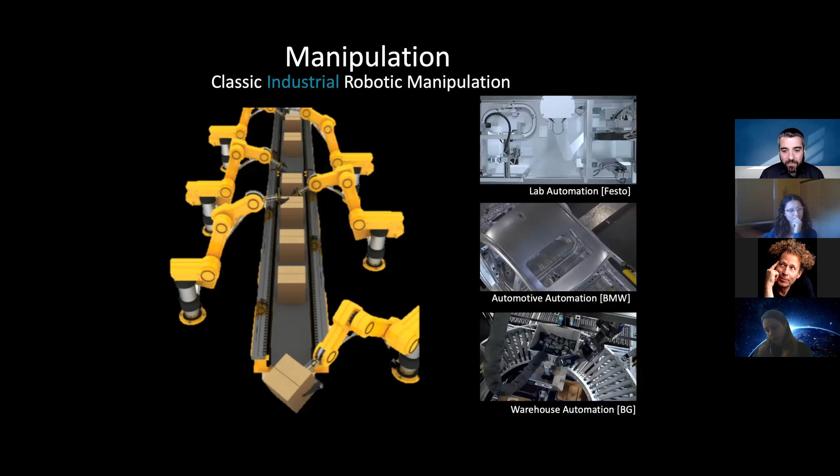So, what's manipulation? The classical industrial view of robotic manipulation has been absolutely successful and has generated dramatic impact in the world—in lab automation, automotive automation, and warehouse automation. It's the idea of moving objects precisely from here to there, one at a time. It's almost always the case that we know how the objects are shaped, we know where they are, and we know where we want to bring them, and there's some repetitive motion that has to be executed.

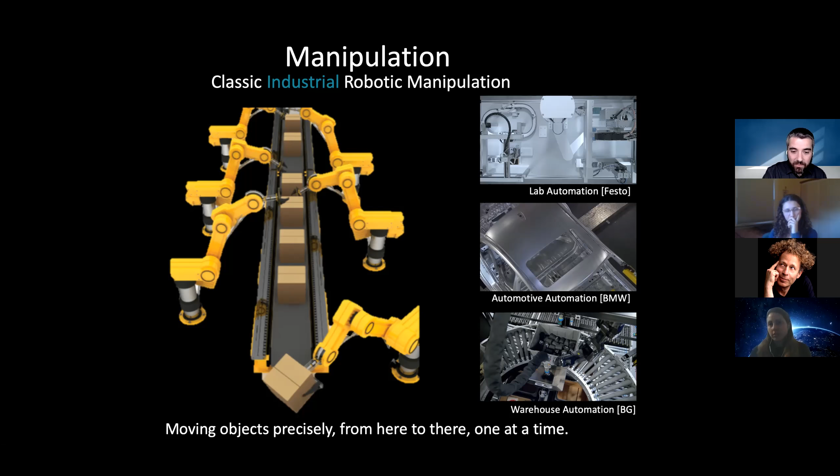Every time we work with a piece of material, it's slightly different from before. We use tools, grasping them in different ways, and novelty is actually rewarded. You're looking for new ways to do things, new ways to bend the world around us to our will. It's that flexibility, that generality, that adaptability of skills needed to work at a crafting table, that is so elusive that we haven't made as much progress as we have on more cognitive skills.

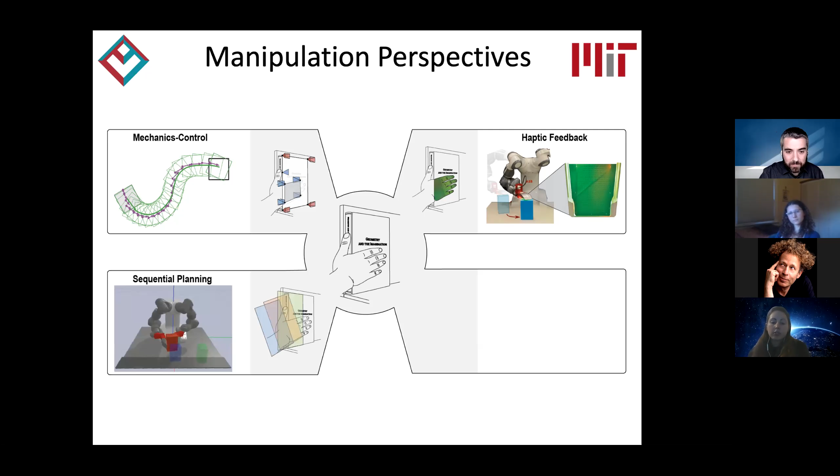A third perspective is where we think of moving the book as a sequence of actions. Maybe the first action is pulling it back, and the book moves parallel to the wall. Then there's a second action where the book is pivoting on the edge of the shelf. And then a third action where the book falls into a grasp. It's the sequentiality of those actions through sub-goals that generates long-term behavior, which has also been the focus of a significant part of the manipulation community.

And then a fourth perspective, embraced more recently, especially in the last few years, is a visual counterpart to that problem. We look at the book and think, what is it about the book, its geometry or material properties, that makes the side of the book an interesting place to put the thumb, and what makes the face of the book an interesting place to put the palm. This is clearly related to visual affordances, and motivated and promoted by the rise of neural networks, but nevertheless is another perspective on the same problem: the visual-based approach.

Now, I'm not saying anything new here. We can think of these as a division of approaches to manipulation based on the nature of the decision process. Maybe the decision process is model-driven, where we have some model of the mechanics, or a simulation model of the long-term behavior of certain actions. The nature of the decision process could be driven by models, or could be driven more directly by sensing.

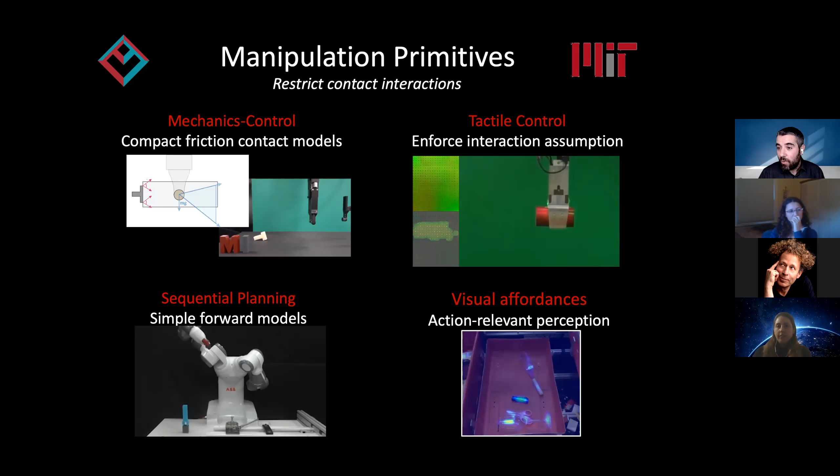So all of this just to say that when we decide to work with manipulation primitives, that has an effect on either simplifying or clarifying what is the role of each one of these aspects of a robotic manipulation system.

But the key discussion I wanted to have today is how these primitives also facilitate the integration between these different perspectives. I wanted to show two particular recent works that we've done. First, on embedding tactile feedback in mechanics models, trying to combine those two top perspectives, as well as a second one on long horizon planning with visual affordances. When we decide to have a perception system that is targeted for specific actions, how can we engage that with long horizon planning?

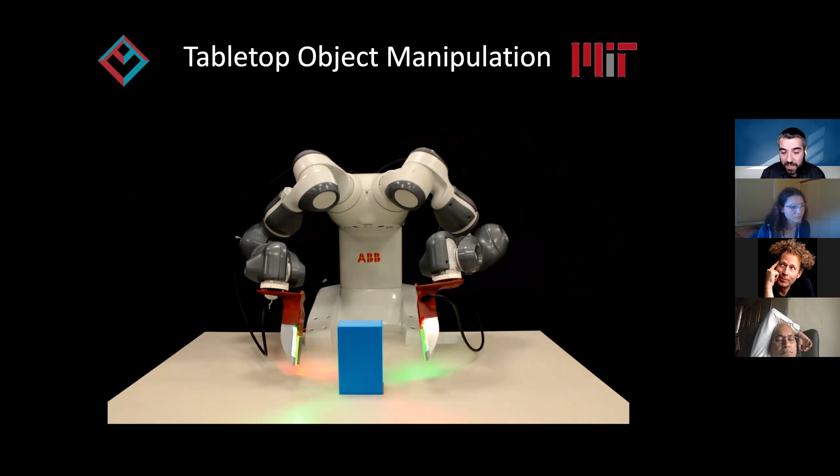Okay, so we've explored this maybe intuitive division of roles in the context of a few systems. And this is one example. There's a dual arm system with two palms, and both provide tactile feedback. And I'll show soon which kind of tactile feedback they provide. But the idea is that we want to be able to generate this behavior in a reactive fashion. The robot is executing a series of primitive interactions with the object. In this case, it's an object with known geometry. And each one of these primitives is executed in a closed loop fashion.

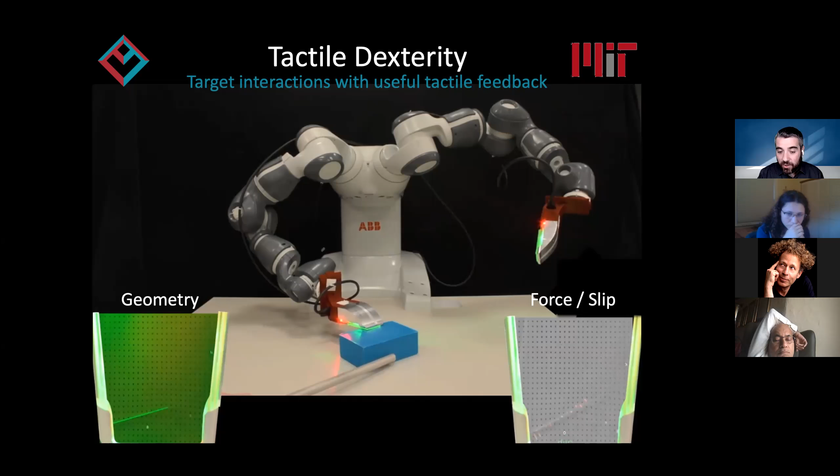So first of all, the type of feedback we get: this is a version of GelSight that has this wedge shape to facilitate interaction, but it's the same idea. There's a camera inside the palm looking at the deformation of the skin of a gel, and by visually tracking the deformation of that skin, we can estimate geometry, and we can estimate shear or forces at the interaction. So on the left, you can see the edge of the object. This is a very structured setting where the object is cuboidal, so that it's easier to know what we need to track in the palm. And on the right-hand side, you see how the sensor is tracking when it's slipping versus when it's not slipping, or trying to estimate contact forces. In this case, it's always slipping. But with this type of sensor, you can capture both things in real time.

Now, if we have access to that type of information, going back to the division of roles of these two controllers, we can derive an object state controller whose task is to replan trajectories for the motion of the object, right? It exploits the assumption of sticking to continuously replan how to move the object to a particular desired location. And because it exploits that simple mechanism, it can replan fast enough. And then there's a second controller whose task would be to monitor the downward force so that, if it detects that the object is about to slip, it will try to exert more force.

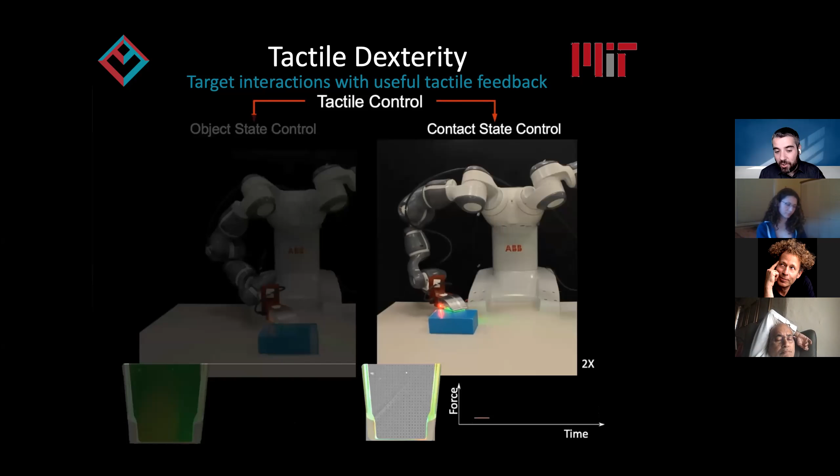So now on the left-hand side, if we perturb the object, the robot will try to bring its current best estimate of where the object is, in this case an implementation with just tactile feedback, to the goal pose. And here's a second controller where, depending on whether the object is slipping or not, it modulates the gripping force, or in this case, the downward force.

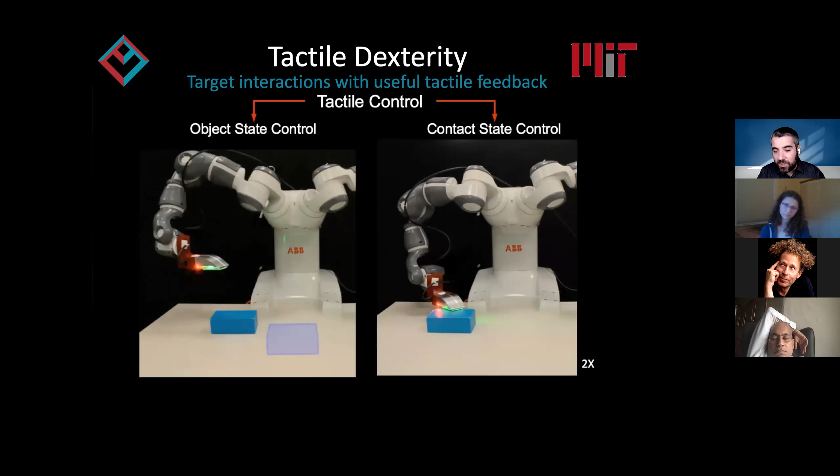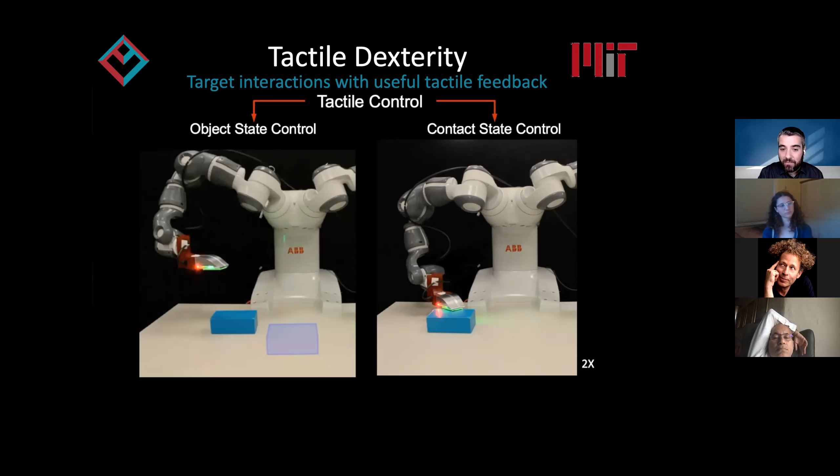And then in general, the first controller is very primitive dependent, right? So every primitive, based on the assumption it's making on the interaction, will have access to its own controllers. If it's pulling, it's just a purely kinematic trajectory, but if it's pushing, it would need to use a different controller. If it's grasping, it will use a different one. And the contact state controller, we can think of it in a more general fashion. The idea is that we have a multi-contact setting, and we want that multi-contact setting to remain constant. We want it to be in equilibrium.

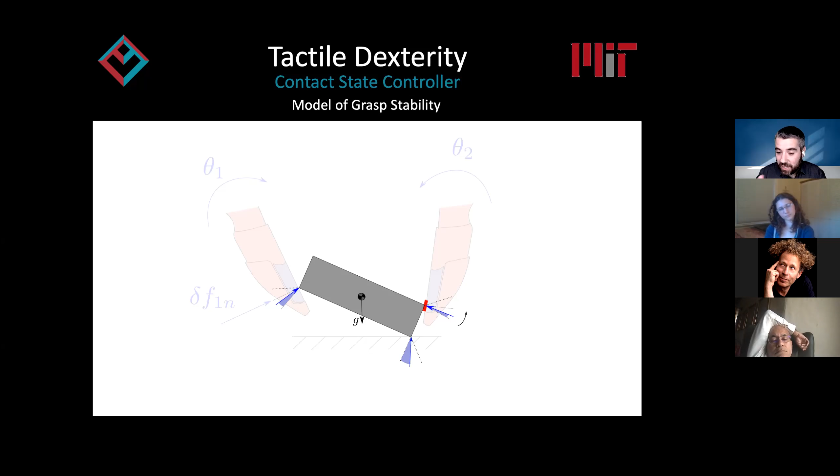We can derive a model of the robustness of this multi-contact setting by approximating it by how far or how close each one of these contact forces is to the edges of their respective friction cones. It's the distance between the contact force and the edges of the friction cones that captures the robustness of the multi-contact configuration. And we can write this.

This is a standard formulation, quite similar to the one used, for example, in the locomotion community, where we try to maximize this margin of stability, or the distance of the contact forces to the edges of the friction cones, subject to force equilibrium. We want to make sure that the contact forces are always balancing the external wrench, in this case just gravity, or possibly also external contacts with the environment, and subject to Coulomb friction law.

And this defines an optimization problem that we can't really solve in real time because the margin is non-convex, has a trigonometric expression, and the force equilibrium condition is bilinear, right? So in this problem, what we're going after is what are the changes in the contact forces as well as the contact locations or orientations of the palms that maximize the margin to the edges of the friction cones.

And because we can change both the Jacobian as well as the contact forces, this is a bilinear constraint. It's difficult to optimize in real time. So we do a convex approximation of the margin and linearize around the current configuration to be able to solve this in real time. And with that, we can implement it in almost real time.

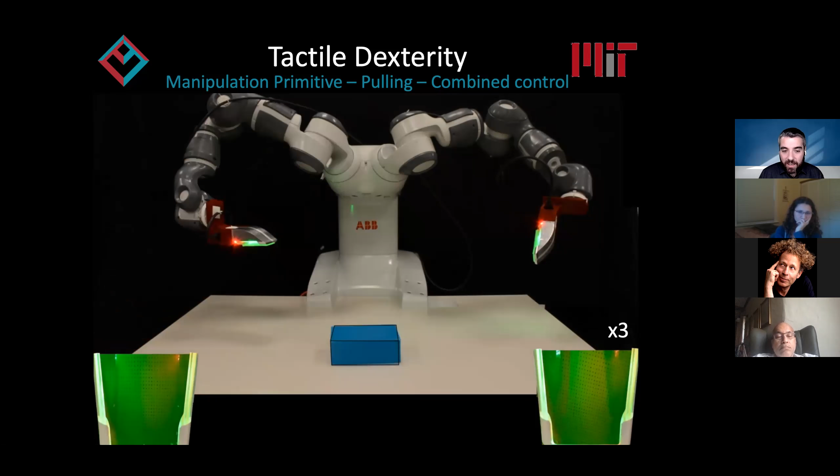And then when we put these together for different primitives, all of them executed in a reactive fashion with their own object controllers, but with the same contact state controller, we can build a system that chains sequences of executions of manipulation primitives to change the location of an object from configuration A to configuration B in a reactive fashion. Reactivity just at the primitive level, not at the planning of the sequence of primitives.

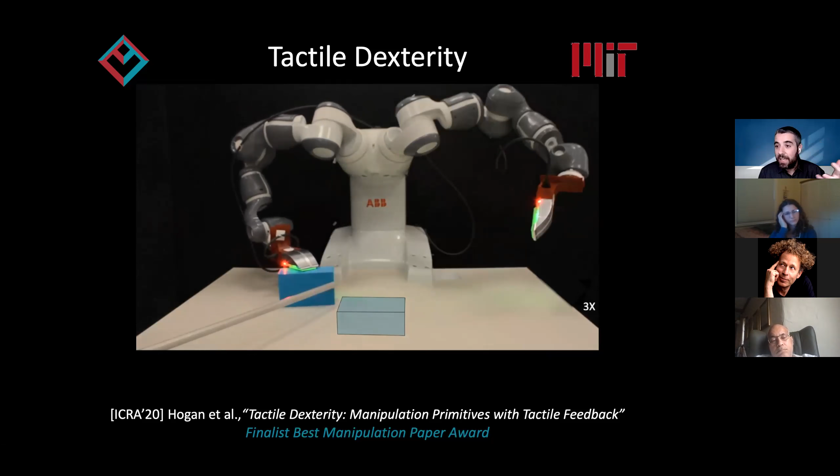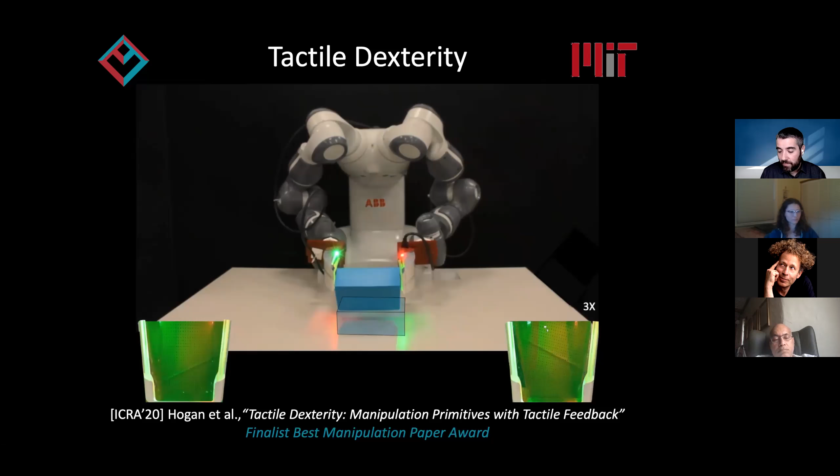And the key idea here is, again, that division of roles between having two controllers, one that is in charge of enforcing a certain assumption that is dictated by the primitive, and then another controller that is just exploiting that assumption to move the object. Now, this division of roles can be used in different contexts, in different manipulation scenarios or with different primitives, and not necessarily just for sticking, but also, for example, for sliding.

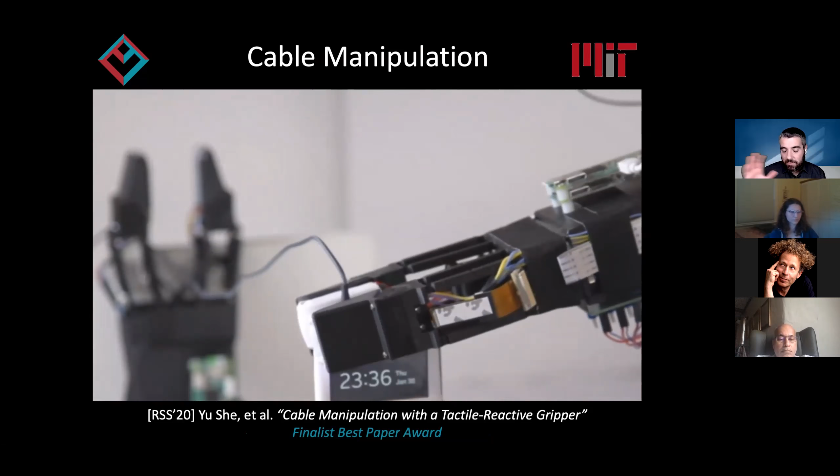Here's another system that we built recently to manipulate cables, and it's again purely driven by tactile information. There's no vision here, and the goal is to get the robot to slide its fingers along a particular cable. And the way that this system is able to do it fast without having to rely on vision to do state estimation of where the cable is in real time is, again, using exactly the same division of roles for two controllers.

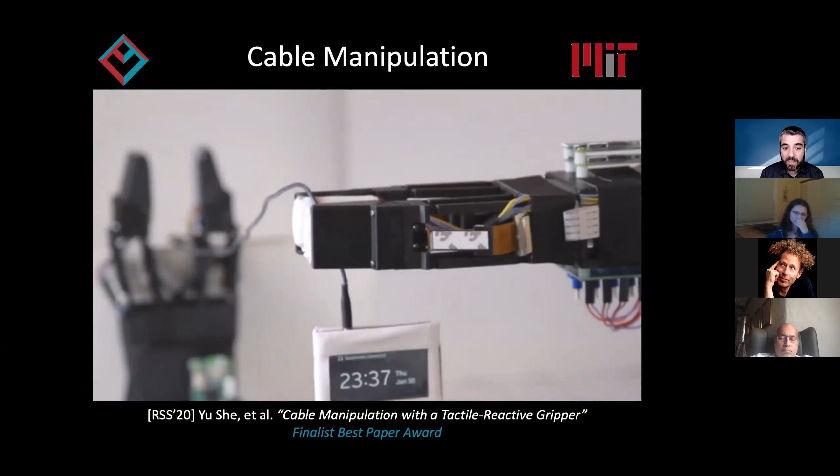One controller is in charge of controlling the position of the cable in the fingers: controlling the orientation of the cable in the fingers, as well as the position along the length of the fingers. And it's doing that by using the real-time estimates from the tactile sensor of the orientation of the cable. And it's doing it also by exploiting the benefit of having a parallel controller on its side that is controlling the gripping force on the cable so that the fingers can slide smoothly along the cable, right?

So that's a task that without real-time accurate gripping control would be difficult to do, because if you apply just a bit more gripping force, the cable would get stuck on the fingers. And if you apply less force than is necessary to maintain it there, the cable will fall. It doesn't matter what the fingers do to be able to recover it.

If the fingers open or don't apply a certain amount of force, the cable will fall. So by combining a controller that is just looking at the gripping force and making sure that the frictional forces when sliding the fingers are within a certain range. That's pretty much what it's doing. It's just looking at the average shear force in the fingers. And if it's too large, it will open up the fingers a little bit. And if it's too small, it will close them a little bit.

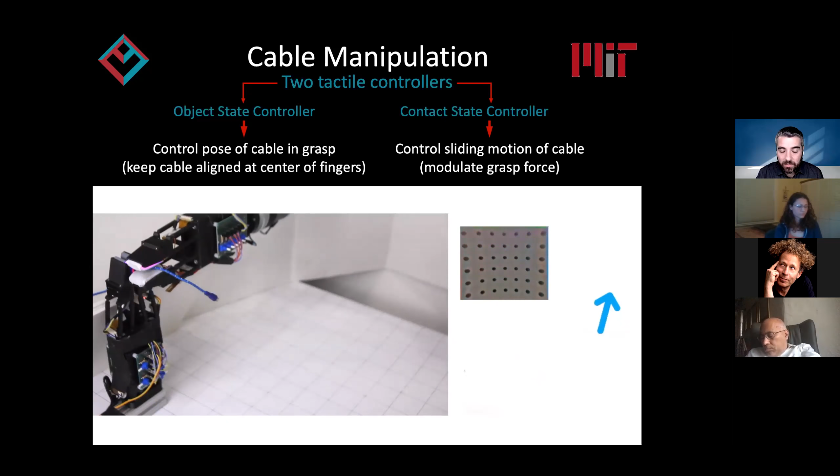And again, it is precisely the assumption of this primitive, in this case that the cable is sliding, that is on one hand enforced by one controller and on the other hand exploited by the other controller. Now it's not in a model-based fashion, the model is directly learned from data. But it's that simplifying assumption of the primitive that makes this possible. Any questions?

Hi, yeah, I have a question. Sorry if I missed this. How are you estimating forces for your GelSlim sensor? Is there a separate force sensor in the gripper? So I guess more or less all of these sensors work the same way. So I'll just illustrate it in the case of this sensor.

Inside the sensor, there are these dots embedded in the gel, and by tracking the location of these dots, we can estimate the displacement or the stretching of the skin. And then you can go the extra step, which we do sometimes, of using inverse FEM to estimate the force distribution. But actually, in this case, it turned out that that wasn't necessary. Just by using a proxy for friction, which would be the average deformation of the skin, that was sufficient to control the system.

Oh, I see. Okay, so I guess you're using a friction model essentially to back out an estimate of the force. Actually, in this case, we're not even doing that. We are directly regulating the gripping force, not to maintain a level of friction, but to maintain a level of stress on the skin. Oh, okay. Got it. Thanks. Cool.

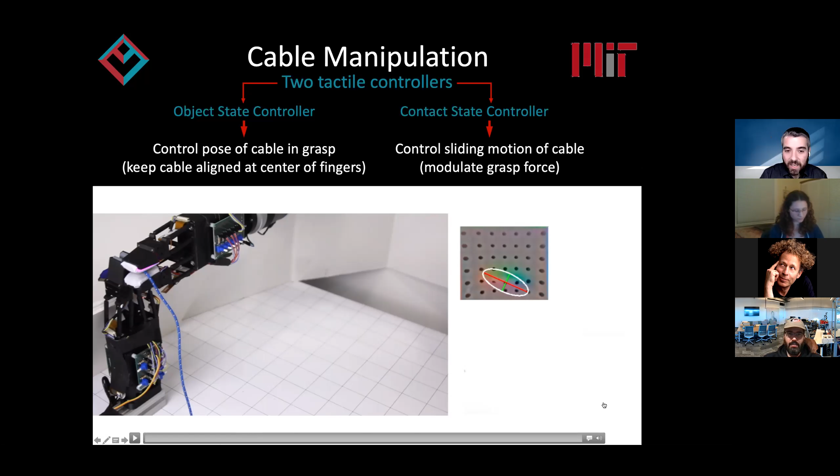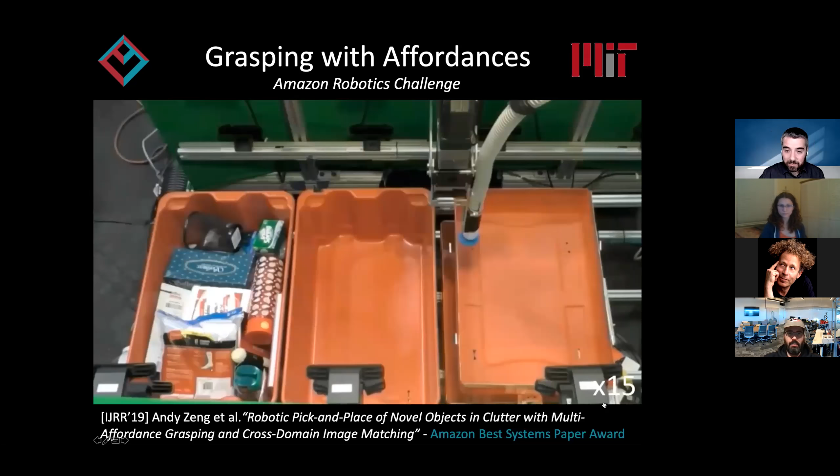I'm just going to give a highlight of the second part. There's been a significant amount of work on what we were discussing before—visual affordances—triggering behavior directly from visual observations of geometry or materials. All of that has generated amazing, reliable performance, especially when dealing with clutter and with the large variability of objects.

In the Amazon Robotics Challenge, but also in a lot of research at Berkeley, for example, using neural networks to learn direct maps from raw perception to action in the form of manipulation primitives has shown amazing behavior. And the caveat is that because we're operating directly in raw perceptual space, we don't have the ability to exploit what primitives give us, which is an expectation of what will happen with that object.

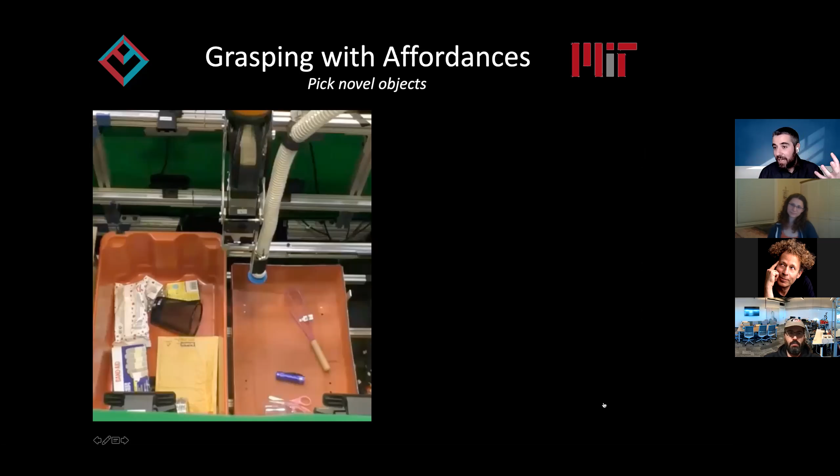So we don't necessarily have forward models to predict how the state will be after executing that action. There's a lot of work going on these days on computing or learning foresight models for what the perception will be after executing a certain action. To me, that's a key challenge we need to address: how to merge these visual affordance models with planning so we can do sequential decisions to generate competent manipulation systems.

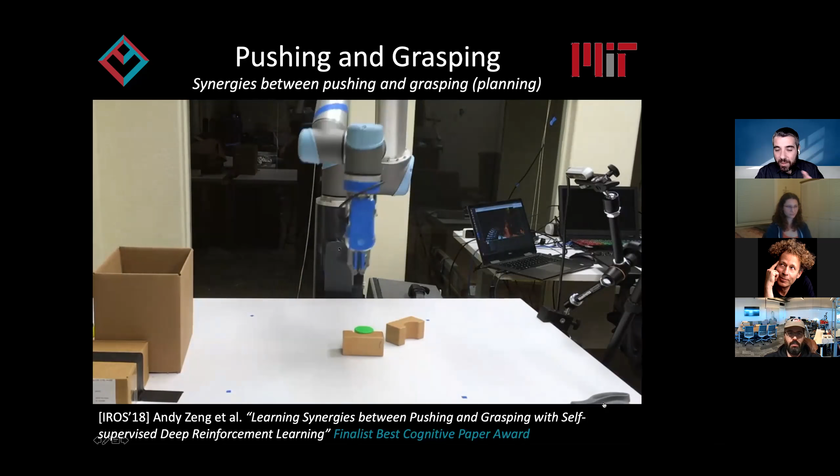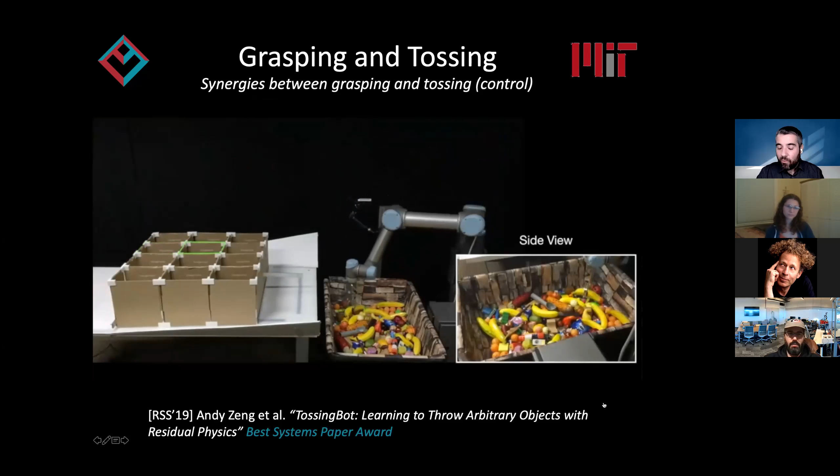I'm going to skip these, but the idea is we've been looking at different aspects of sequencing manipulation actions, always without necessarily having an explicit model that predicts what's going to happen—using deep reinforcement learning to sequence pushing and grasping, or grasping and tossing. But all of these implementations explicitly avoid having to do a forward prediction of what the state will be in perceptual space after executing a certain action.

When it comes to solving problems like the one I showed before on a tabletop scenario, doing that without a forward prediction model is quite limiting. If you want to plan a sequence of actions like a pull, a grasp, and then a push, it's very difficult to do without the ability to predict forward how the observation space will be after executing each primitive. So one of the things we've been doing is finding a way, defining a framework, to be able to do that.

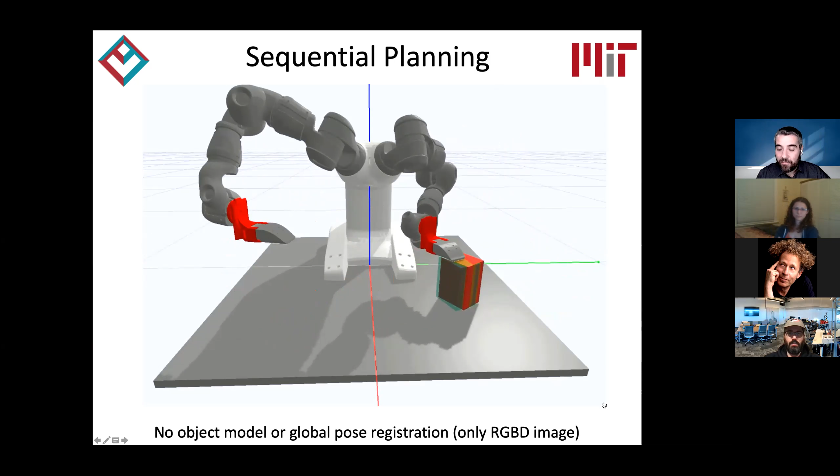Again, the idea is to exploit manipulation primitives and the assumptions that they make. We need to expand this notion of affordance from just locating a point in RGB space to having a more precise model that predicts contact locations. And then we need a predictive model so that we can change subgoals, for example to plan this sequence of pull, grasp, push. I'm going to skip some of these so that we get to the end.

But the basic idea is that I'm going to go to the key idea slide: we use a representation of objects in the form of rigid body point clouds. For us now, objects are a segmented part of the point cloud directly in observation space. And we constrain ourselves to using primitives where the contacts are sticking to the objects, which in combination with the representation of the objects gives us a natural way to do forward prediction or forward propagation of the implication of executing a particular primitive.

So we learn an affordance in the form of a map between a segmented part of the point cloud and where we should contact that segment, and what will be a useful subgoal that's compatible with the reachability of the robot, collision avoidance, and everything that might prevent the primitive from executing. We put all of that effort into modeling those constraints or limitations on the affordance model.

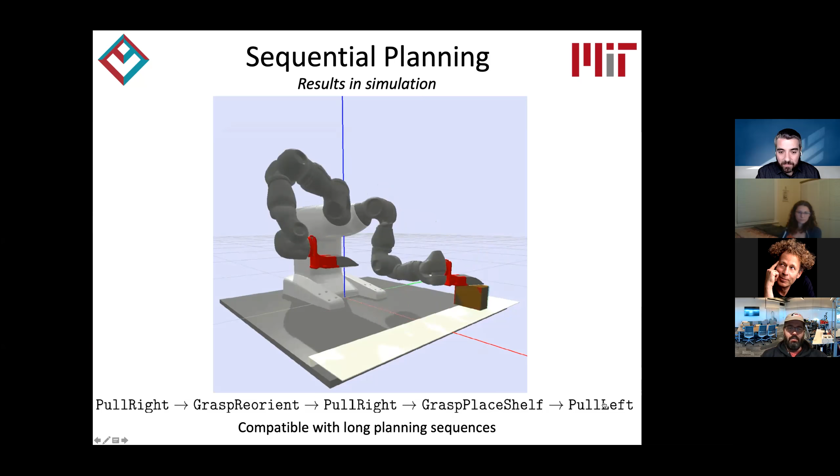Because this is driven directly from raw observations of the point cloud - and this is, I would say, one of the most important points - the affordance models have the ability to generalize to different geometries beyond what you'd expect from a normal planning model. So in this case, with one of the objects from the YCB dataset, it still figures out that it can bring it to the center and then re-grasp it.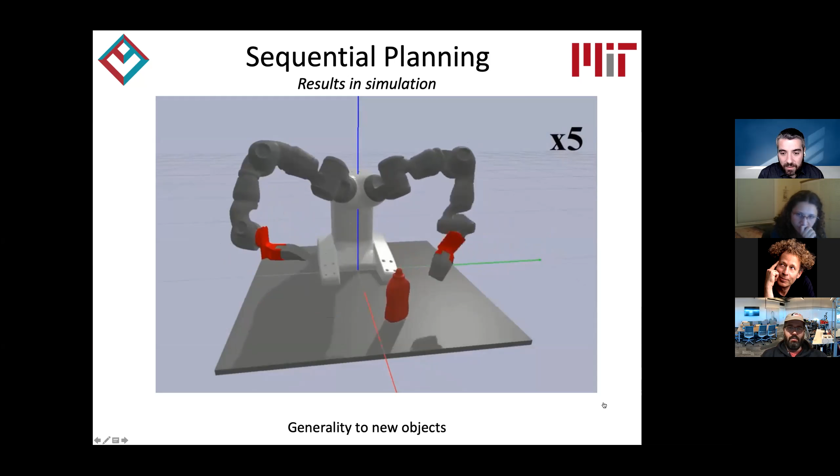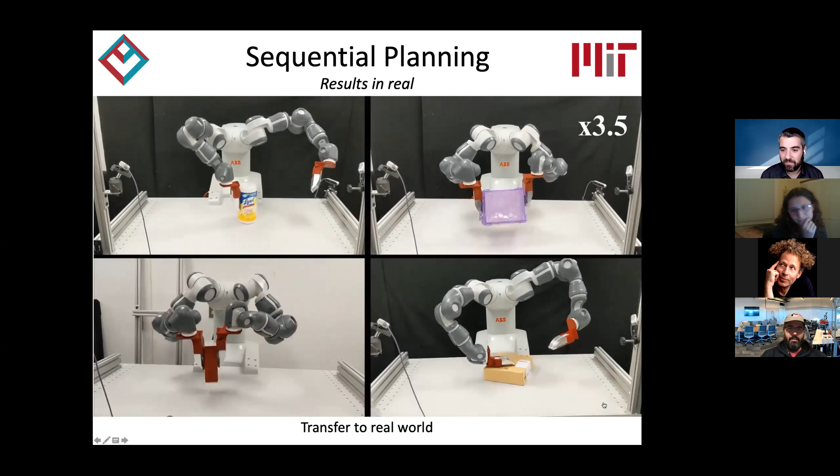Alberto, it's Ken. I'm so sorry, but I'm going to have to head over to the other meeting. But I think this is great for you to stay here. I think we should take a moment to thank you on behalf of all of us for sharing all of this with us. I look forward to seeing you back in my lab meeting in approximately twenty minutes or so. But the others will stay and are happy to answer questions. You've got still forty people here, which is far more than we normally get on the Monday seminar. So you're doing great. Alright. Excellent, thank you again, Alberto. Talk to you later. Thanks, Ken. Okay, talk to you. Bye.

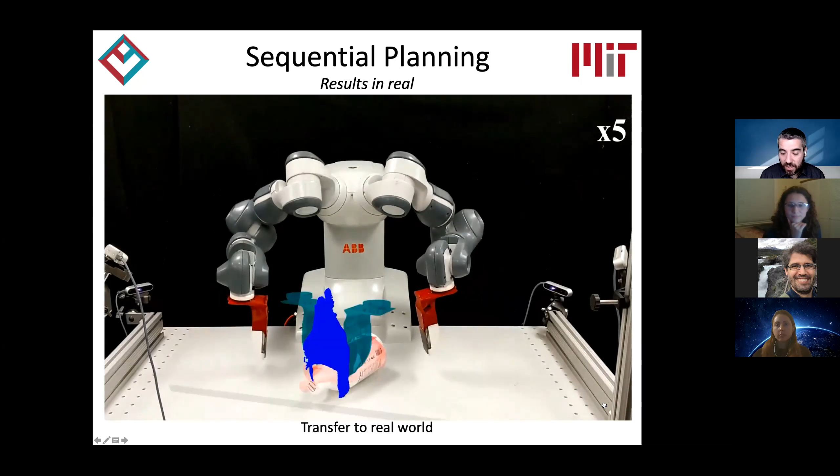And this is just the last video, just showing that because we're using point clouds, it has an easier job at generalizing to real world observations. The system has never seen a bottle like this - it has only been trained on cuboids - but it still has the ability to plan the sequence of actions.

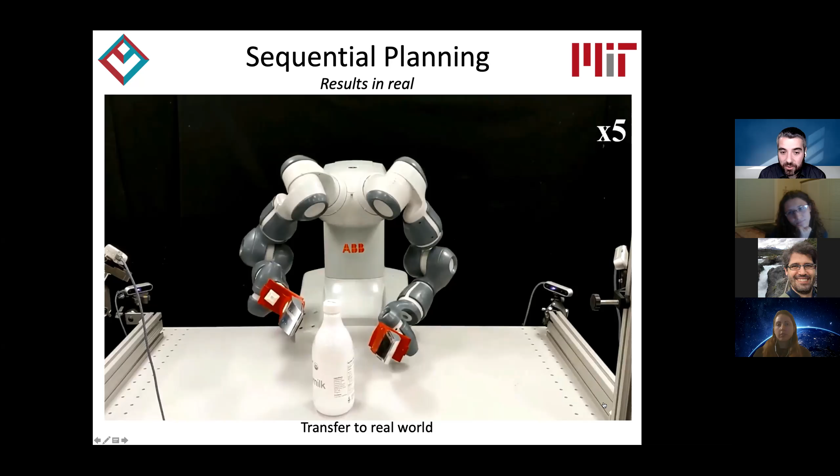Okay, so this is the end of the presentation. Four different perspectives on robotic manipulation, and the key idea that dividing manipulation into manipulation primitives simplifies computation and allows integration of some of these perspectives. I showed a couple examples of how to use tactile feedback into mechanic models and how to do planning with direct visual affordances of geometry.

And I just wanted to highlight Francois Hogan, who is the main author of the tactile dexterity work, and Anthony Simeonov, who is the main author of the planning work. Excellent, and I'm happy to take any questions.